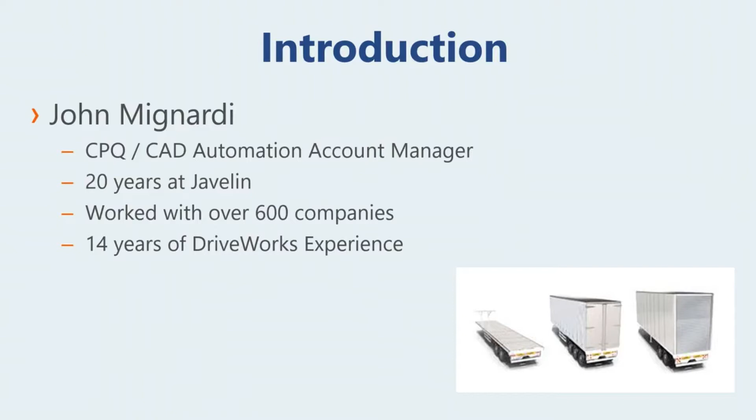I've been with Javelin for over 20 years, actually 20 years and 4 days. My focus 100% of the time is to work with automation, CPQ, and CAD automation. I've worked with a lot of companies over the years, one of which is going to be presenting today. The platform we use is called DriveWorks. It's a SOLIDWORKS Gold partner, and part of their software is in every license of SOLIDWORKS.

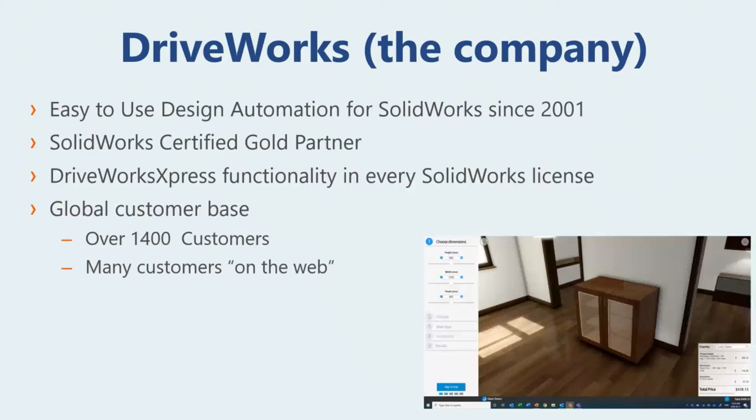One of the presentations I'm going to show today is the higher level of implementation available using the technology. We've got a dedicated team focused on DriveWorks, CPQ, and automation - a lot of experience, 4.5 full-time guys. For several of our customers, 8 of them, we are actually their DriveWorks service provider. So we're not only selling the software, but actually using it every day to help our customers become successful.

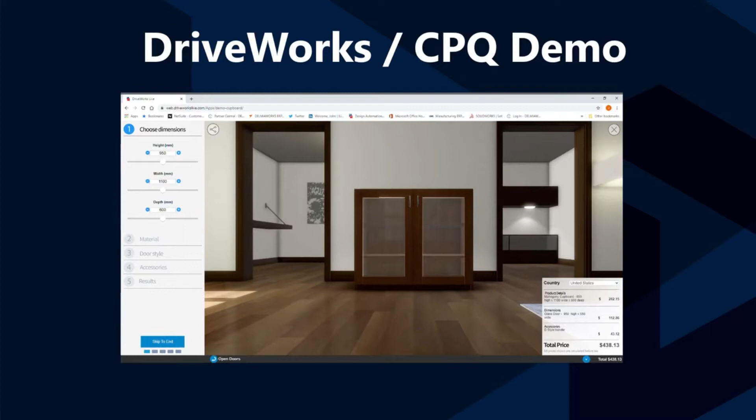So this is just a real quick movie that I put together that shows an application that's web-based. You don't have to go web-based, but if you wanted to, you could. I'm going to show a little bit about the interface and some of the things you can do, such as showing details of a quote or not showing. These websites can be built any way you want.

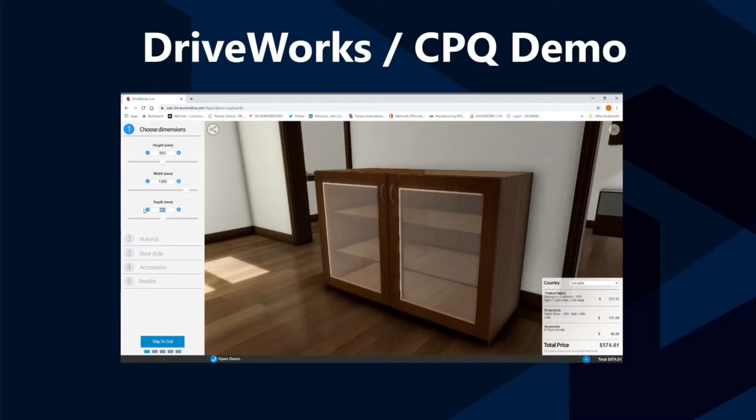In this case, I'm going to adjust the size of the cabinet, and you'll see anytime I change a value - whether by data input, pull-down list, or entering a value - the physical size of that product is going to change. One thing about that is it changes based on rules. So if you go beyond a certain size, you may have to thicken some materials or add bracing. And as these changes are made, the pricing and other details associated with that product will change.

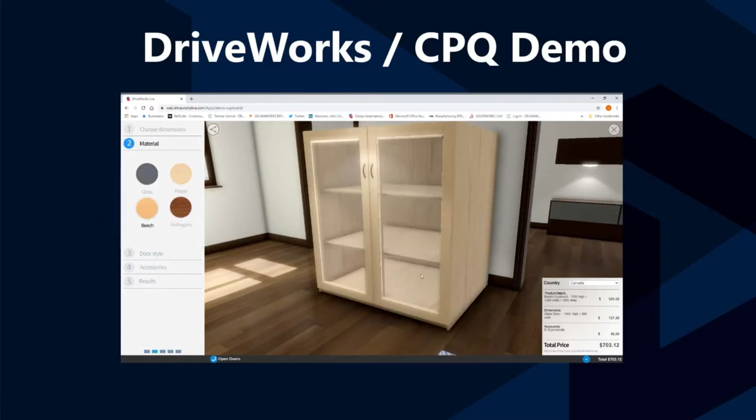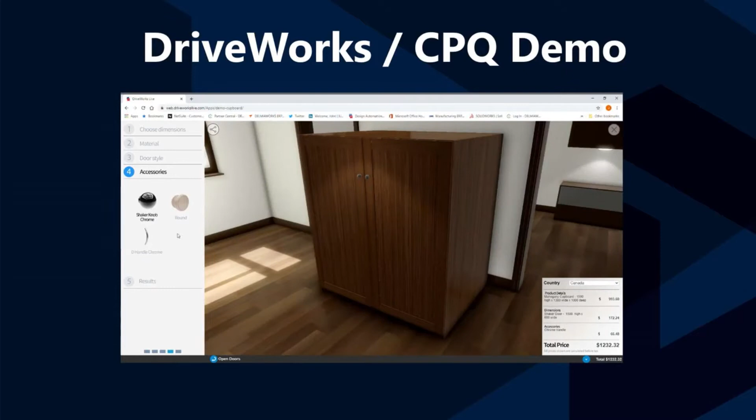This happens because this platform, DriveWorks, can be connected to external databases. So whether it's an ERP system or CRM, you're able to automatically update information about this product. The other neat thing is that you get graphical updates, so your customers can see what this product is going to look like and make purchase decisions based on appearance. Do I like a certain material or door style? As I make those changes and get that feedback, I can decide whether I want this product or not - is it going to go with the furniture in my room - those types of decisions.

One of the key things about DriveWorks as a platform is that you can generate outputs automatically in real time. This is all happening in real time - it's not accelerated, this is how fast the system works. So you've got a cover letter, a quotation, you can produce a bill of materials and cut lists, all in a highly automated fashion, so you're ready to manufacture this product once somebody places an order.

The other unique thing about this application, because it's based on DriveWorks, is - and this is for demo purposes - I'm entering my information. If you wanted to, you can go to this website and go through the specification process to see how the system works. But one of the key things about this DriveWorks platform is that it will allow you to automate the creation of drawings and other SOLIDWORKS content, so you can build as many configurations of a product as you want without having to worry about creating every single configuration within your system.

Using SolidWorks, you can let DriveWorks create all the content automatically when you need it. In this example, once all these new parts have been created, the graphics will be displayed running across your screen. Once I've configured this product, I have the ability to generate all these outputs, which includes renderings, drawings, bills of materials, quotes—anything and everything you would need to put this product into production.

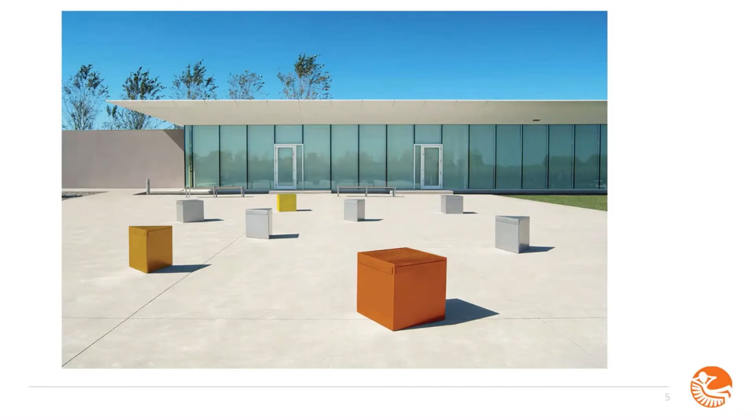To give a bit more insight into our company, we serve the North American market, and right now our sales are split almost evenly between the US and Canada. We have sales reps throughout the provinces in Canada, and several sales reps positioned throughout the US.

In the industry, we're known as the high quality outdoor manufacturer of furniture. We have a 5-year warranty. And the thing I'm most proud of is our lead time. We actually win a lot of projects because we're able to ship in less than 8 weeks, usually 6 to 8 weeks for most of our products.

A lot of our competitors, I'm told, are in the 12-week plus range. Because we have lots of different components and variations of our product, everything is built to order, and that's key for us. We don't carry any finished goods. We get an order, and in a lot of cases, we actually produce it from scratch in 6 to 8 weeks.

In the early years, when Maglin first started, we were a company basically dealing with smaller municipalities, small cities, some landscapers and contractors, mainly in Ontario. But as we developed, we quickly realized we needed to work with landscape architects. The reason being, architects were working on these fabulous projects, like the one you see here. When we got involved with them from the beginning, we would get our furniture specified into these jobs. Being specified into a project is very important, and it turns into a sale once the client and architect work out all the parameters for the site construction.

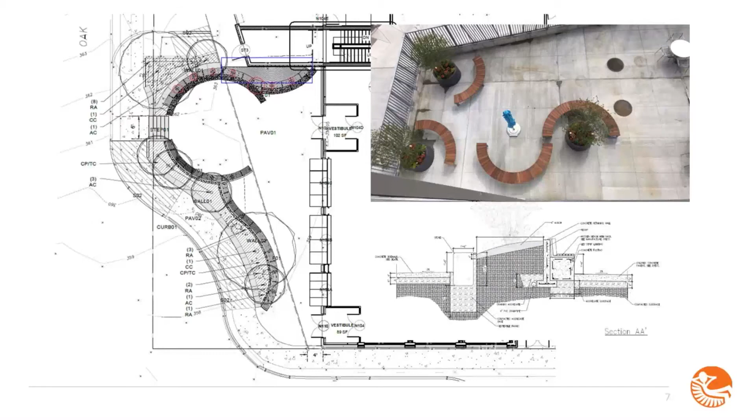When I talk about John and our connection with Javelin and SolidWorks, obviously Javelin's been a big supplier of ours for CAD software for a number of years.

So when I go to our story about DriveWorks, I always go back to what I call the Ogden story. John mentioned it a little before my presentation as well. Obviously the 6-foot bench doesn't fit every site requirement. There's this one project that came up in the photograph here. It was an architect we worked with in Chicago, and they were redeveloping an area on Ogden Avenue in Chicago. We worked with the architect and developed this custom bench. It was really interesting, and a bit of a challenge in terms of the length and breaking it down for shipping and installing it on site, but overall everything turned out well.

With this photograph, the sales and marketing team got a hold of it, and the salespeople shown it to quite a few architects throughout North America. As a result, we got quite a few requests on this bench or a variation of it. Over the period of 3 or 4 years, we actually built quite a few variations of this one bench.

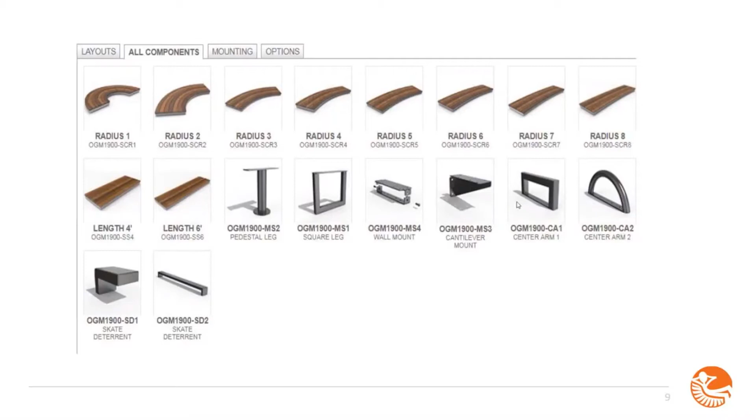The sections were approximately 5 feet in length, and they would connect end to end. So you could have a standalone bench with supports, like the pedestal leg or the square legs, or you could mount them on walls, or mount them off walls with a cantilever mount. We also had accessories like arms and skate deterrents. So basically with this system, we could do a layout of almost any arrangement and any continuous bench for as long as you would want to have a bench.

The challenge we ran into was once we offered this product and started working with architects, getting specified on certain projects, you can see with all the different variations, we had a real challenge finalizing what the sale was for the products.

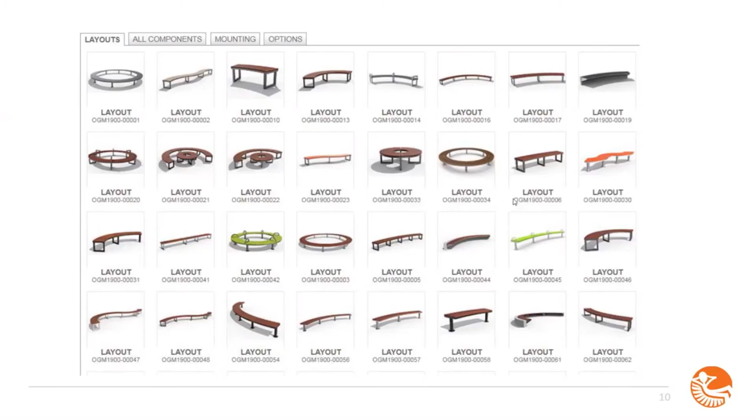Typically the sales team would put in a request with our designers for a layout, and it would take a couple of weeks to schedule it in, then we'd produce a layout for them within basically 2 weeks. As we got busier with this product, because it was very popular, the turnaround time became longer and longer.

So when we talk about new challenges, obviously doing approval drawings for this product. Because it was built to order, with so many different variations of the seats, we didn't want to proceed with manufacturing without a sign-off from the customer. If we built the wrong radius, chances are we'll never use that seat again. With 1,300 different variations, it was probably just going to be scrapped.

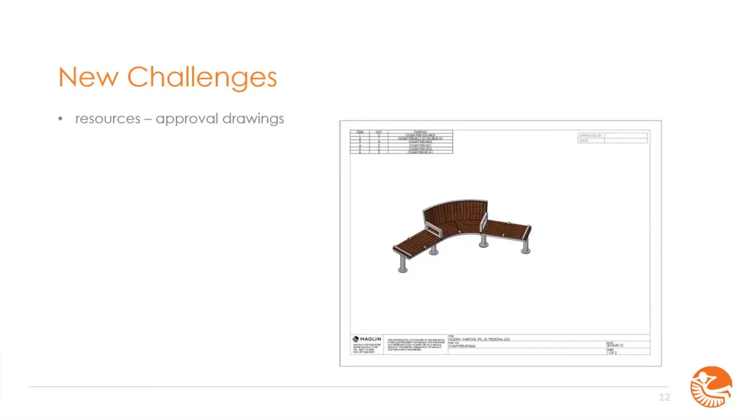And then again, with increased lead time. So when I say I'm proud of our turnaround time of 6 to 8 weeks, I can do that as long as I know what we're building. When we're going back and forth with the client on the order, that 6 to 8 weeks became longer and longer with several changes, and our lead times on this product alone went up to at least 12 weeks.

The other challenge we had initially was this was a new product we were showing to everybody, and it did fit the bill for 90% of the specifications, but the other 10% it did not. We had to modify a lot of our Ogden products from the get-go to actually make them match up properly to what they required on site.

So that's what brought me back to John. I recall that conversation or sales call we had at Maglin, and I wasn't familiar with CPQ at all. So he explained it a little bit to me and how it worked. And sure enough, I told John what I was looking for, and then he introduced me to the online...

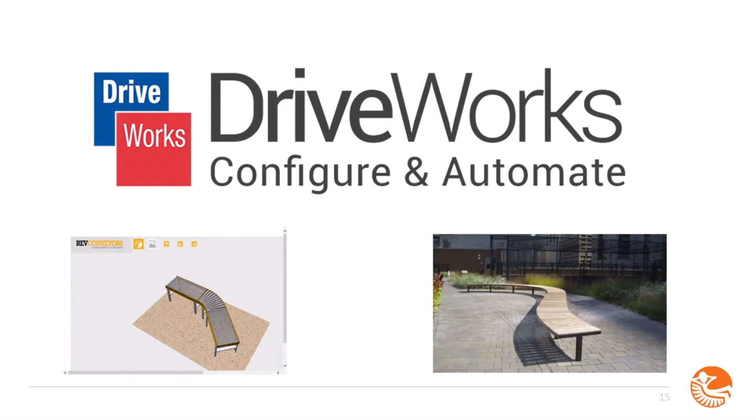So basically, I worked with John on the whole pricing for the software, which was pretty easy to do. We came up with a training plan. I took a couple of our main key people at Maglin in engineering, and we did some on-site training. Then we did some training in-house with John's support team. And we undertook this project.

It was a lot of work. There were so many different variations with the different seat configurations and all the different materials that we wanted. But we came up with a really good plan and worked our way through it. It took a lot of time figuring out the resources in terms of people and hardware required, but John also helped with the support in trying to get some money through funding and just supporting us through the whole way.

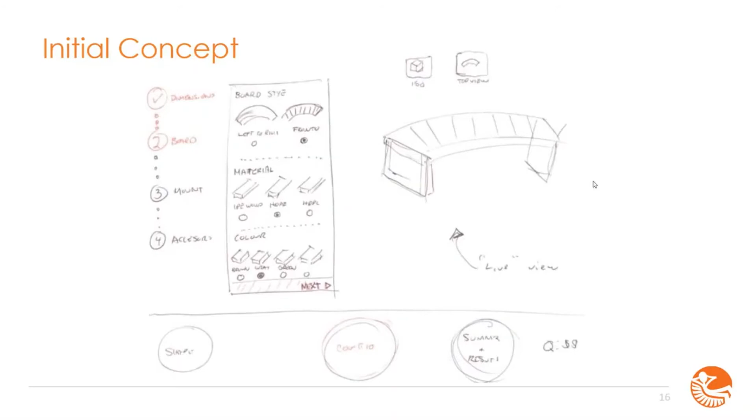It was probably the biggest project we took on right from the start with this one. So what we came up with was something like this, and the whole idea initially was we were just going to give it to our sales team. So we were basically handing off all this work that our designers were doing and giving it back to the product coordinators that sit in-house and work on the phone with all our clients.

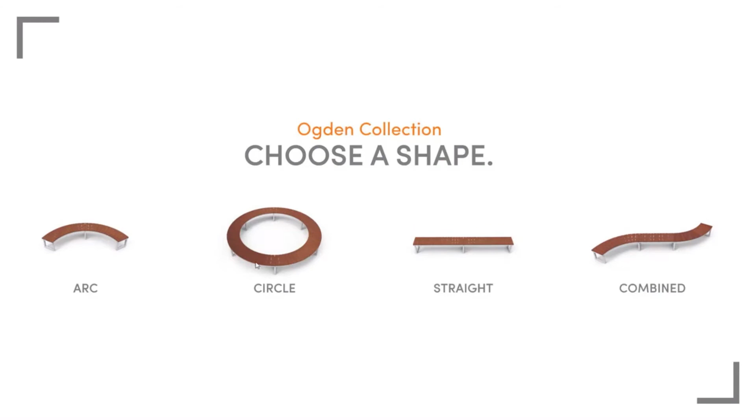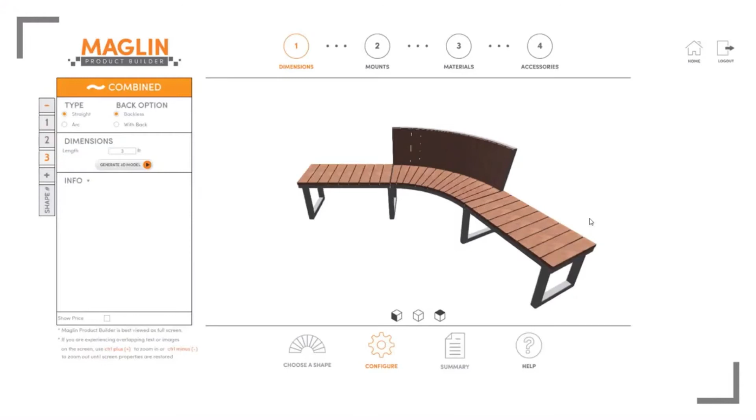So basically, they would just pick a shape that they wanted to start with. Then you start with your seat sections, you build them up one by one, so straight sections, curved sections. We added backs to it as well. Then you go into the different mounts that we talked about, so you have square legs, pedestal legs like the original Ogden system, and wall mounts.

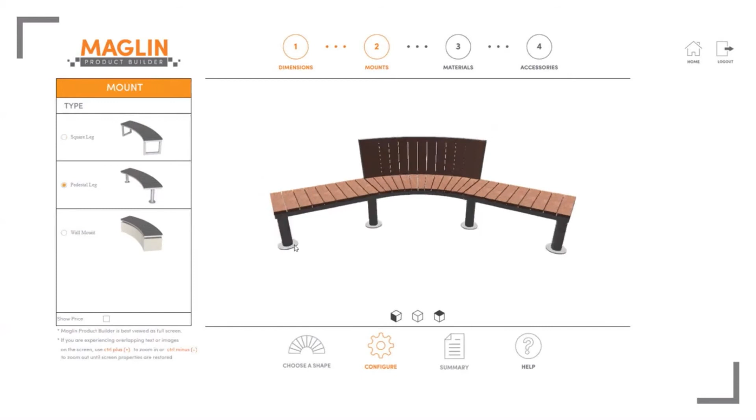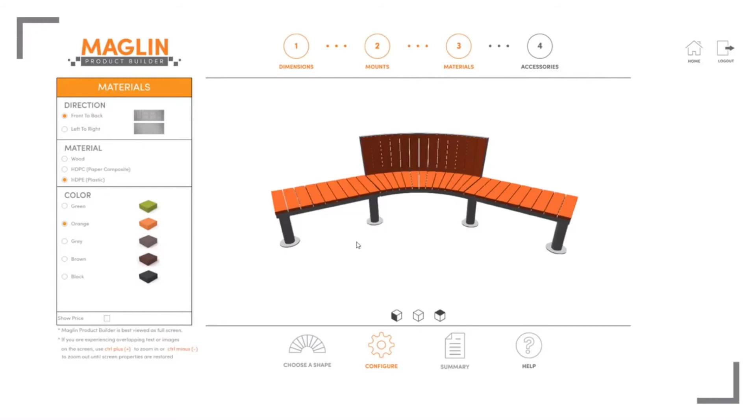And then the seating materials, which we've added more as we've gone along. So we have plastic, which is recycled plastic. We have paper composite, and then we have wood as well, Ipe and thermal ash. And then the accessories, so different arms that you can add and skate deterrents as well.

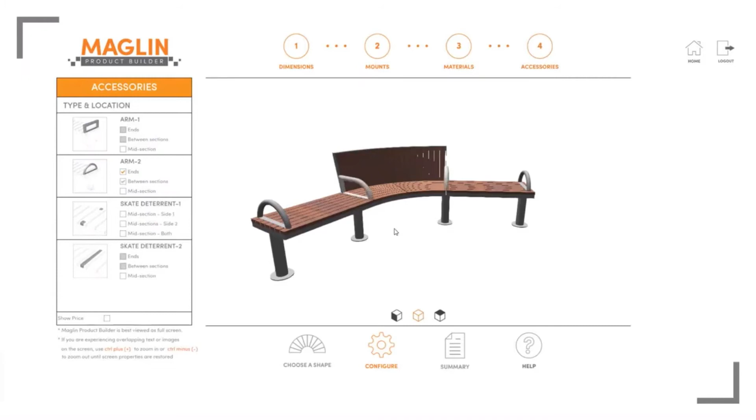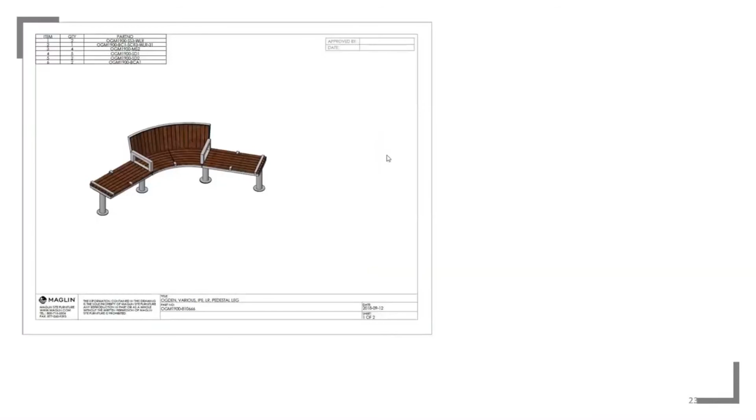So what this would do would obviously put the pricing together for the salesperson, so they didn't have to actually go through and pick out all of these different parts to make up this assembly. And then they would put their request through for a layout, and they would get an email saying that the software was working on their estimate and also their drawings. About 20 minutes later, they would get this email, which would have the quote attached, and then also the approval drawing for the customer.

Because we were working with landscape architects, if it was a project in the initial stage, you'd also want a CAD drawing as well, so we provide that. So this basically took all of that legwork away from the design team entirely. So there was a lot of benefits that came out of this.

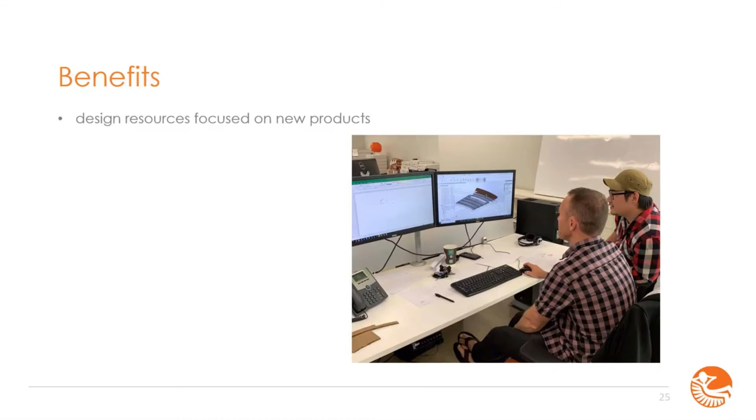Some benefits we knew were going to happen, but there were some we really didn't expect until we got into this program. Number one, obviously, our design people were back to focusing on new products. In this industry, you need to be developing new products all the time and come out with new products at all these trade shows for the landscape architects. So we took our 2 or 3 people that were working on these layouts day after day, and we handed that back to the sales team.

Lead time, again, back to the regular 6 to 8 weeks. So basically the order would come in, there was no questions about what it was. We had an approval drawing signed, we were ready to go straight to production. So that timeline was just the time for us to actually manufacture and assemble and ship the product.

And then one of the things that I didn't really realize was happening until later was we had a reduction in inventory. This was such a popular product that within a year or so, it represented about 20% of our sales. Our company grew about 3 times over the period of 6 years, and I was trying to get more and more warehouse space and manufacturing space as we grew. So every year I'd have to come up with a plan for our budget and try to figure out how much more space am I going to need this year.

Well, when we started doing this, what I realized was our space requirements started to level off. Even though the sales were still growing, these space requirements were leveling off because basically we're pulling these materials in and they were constantly in WIP, so they never really sat on the shelves.

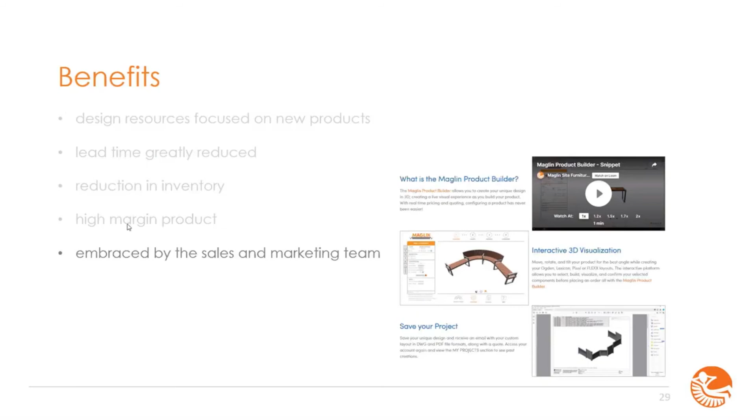And the other thing that it gave us is a new approach to product development. For example, with Ogden, we offered so many different radiuses. We had another bench product before that was limited because we only wanted to offer 2 or 3 different radiuses, so you start thinking about how you're doing your manufacturing. We have another product coming up where we're setting benches together, segments at different angles and platforms, etc. We realized why be limited like our competitors to 2 or 3 different angles when we can offer any angle? It's really just about our approach and how we take that arrangement into manufacturing.

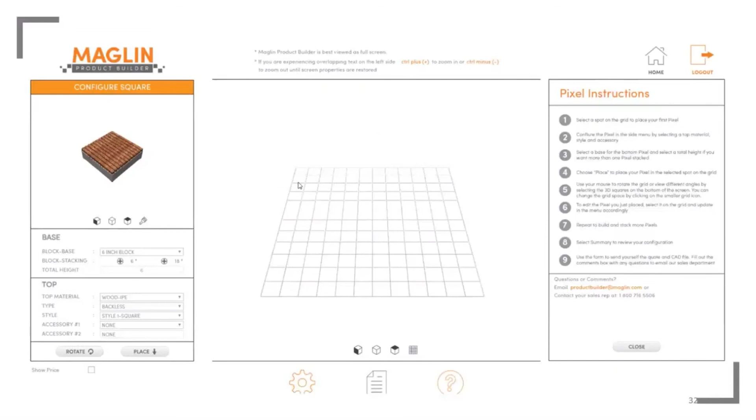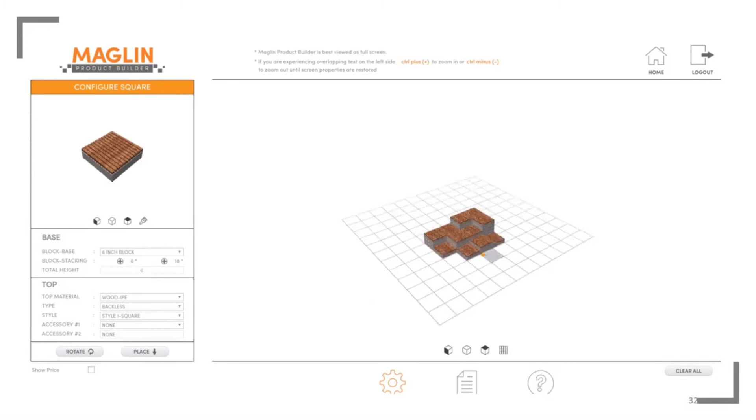And then other products we've worked on since - our products have really developed from just standard benches. Now we're coming up with platform systems. This is Pixel, one of the new products we started working on. Online, we do basically a grid system so you can put it all together. You can just imagine how difficult it would be for a product coordinator to try to work with somebody over the phone and develop a system like this. I personally think it'd be impossible. So without software like this, I don't see this product being offered by Maglin.

Again, the layouts, approval drawings - because we've used the configurator, a lot of our new products are going this route as well. So Flex Collection - it's the first time we've come up with a fence gate system. Again, all configured online, and yeah, it's quite amazing. So we're doing a lot of new product development just with the product configurator in mind.

The other couple of things I probably mentioned too is we've also been developing a lot of internal procedures in terms of shipping and packaging. Our salespeople have to go and get quotes, and when you come up with a system that is very detailed, like Pixel for example, it's really hard for them to figure out how many boxes are required for shipping a system or arrangement like this. So our configurator actually calculates how many boxes are required.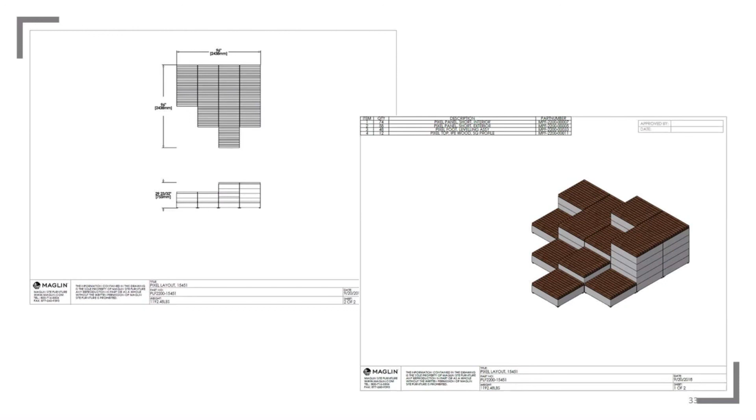And it's worked so well that we're actually taking our whole line of products now and making it so the salespeople can just punch in all our model numbers and the quantities, and it will come up with a quantity of boxes. And then we have a freight provider now that actually works with us, and we connect with their system. We just put in the postal code, and it returns a freight quote to us. So going back and forth with customers and making changes to quantities and everything else, a lot of times it would be difficult for the sales reps to wait a couple of days for another freight quote. Now we can get it instantly online.

We're actually taking all that into the plant as well, and that information can be used to confirm that we work with the same number of pallets the customer was expecting, and then we match up our freight costs in the end, and we don't go over. So that was basically it.